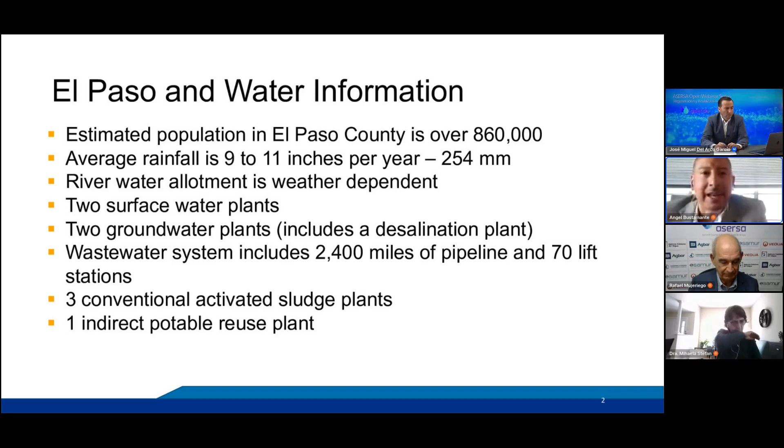So this is a snapshot of El Paso's water supply. For any given year, El Paso produces about 40 billion gallons of drinking water, which equates roughly to about 150 cubic hectometers per year.

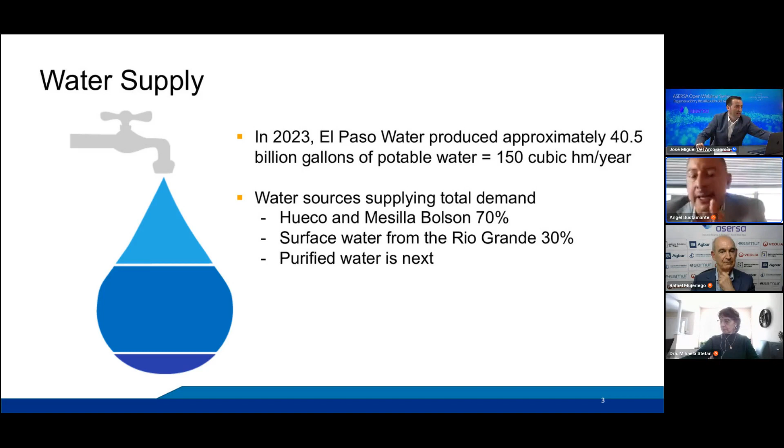Angel, where does El Paso Water get their drinking water from? We have 2 groundwater bolsons, the local aquifers here. They supply roughly 70% of our local demand, and surface water supplies about 30% of the demand. Purified water is next, and I will go into great detail on that in the next slide.

And I always include conservation on the list, right? I believe many of us in the audience are engineers, managers, or work for a municipal government. It's important, especially if we're in a drought, in a desert environment like El Paso and West Texas, to really convey that message to our customers. They already know that, however, I think it's good for continuous improvement to remind our community that we don't live in a place that has excessive water.

There are some places around the world that are maybe surrounded by water, but if you're in a desert environment like Spain or different parts of Latin America, I've heard that different parts of Brazil have been experiencing drought, where even rivers have dried up. Here in Texas and different places of the western United States, Arizona, New Mexico, we're all in drought.

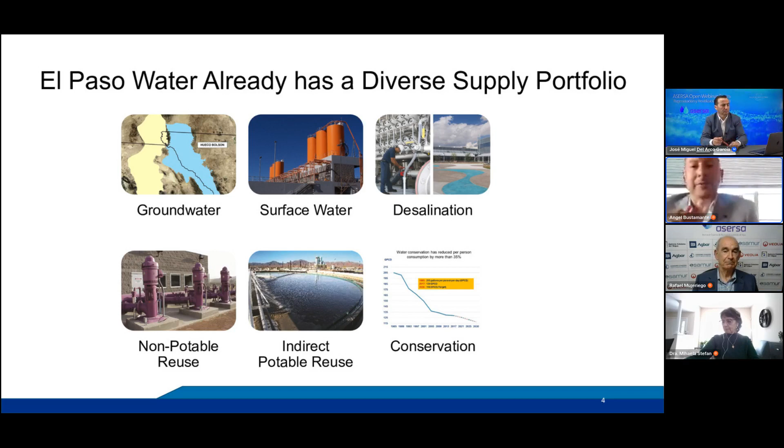Okay, so non-potable reuse. This is water that we've been able to reclaim back from our wastewater treatment plants and use for beneficial reuse. We've been doing this since the early 1960s. These are some pictures of our reclaimed water infrastructure here in El Paso.

We're primarily using the reclaimed water for cooling water for industrial purposes, and to supply water for irrigation, for parks and schools. All of this helps because it reduces the demand on the drinking water supply. We roughly supply about 700 million gallons total water every year to these different parks, fields, or schools for irrigation. We've been doing that here in El Paso since the early 1960s.

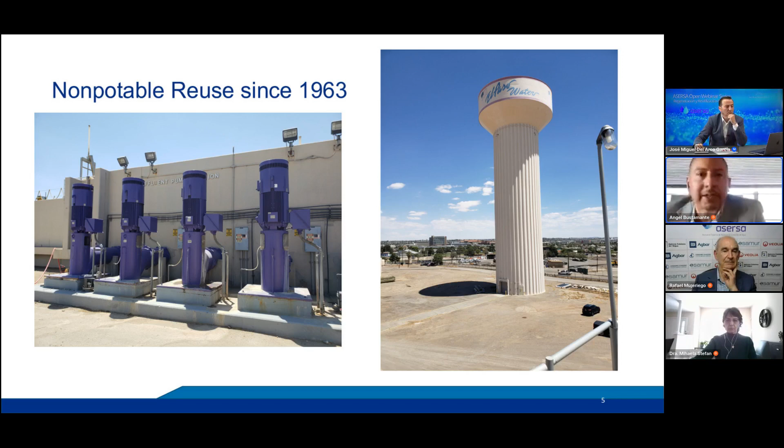This is a picture of the plant I'm working at today, the Haskell R Street wastewater treatment plant. Many of our customers may think of water that goes down the sewer from people's homes into the wastewater plant as water they would never think possible to reuse. However, with the strategy of One Water and trying to utilize wastewater, it's important to tell our customers it's not just a waste product, but a potential water resource for beneficial reuse, possibly for indirect or even direct potable reuse.

So these are pictures of the plant. The picture on the left shows our sand filtration, which reduces turbidity in the water, and the picture on the right shows our secondary clarifier. On average at the plant, our total suspended solids leaving the plant are roughly in the neighborhood of 3 milligrams per liter, and under the sand filter, less than 1 milligram per liter. So very good water to possibly use to feed an indirect or potable treatment plant.

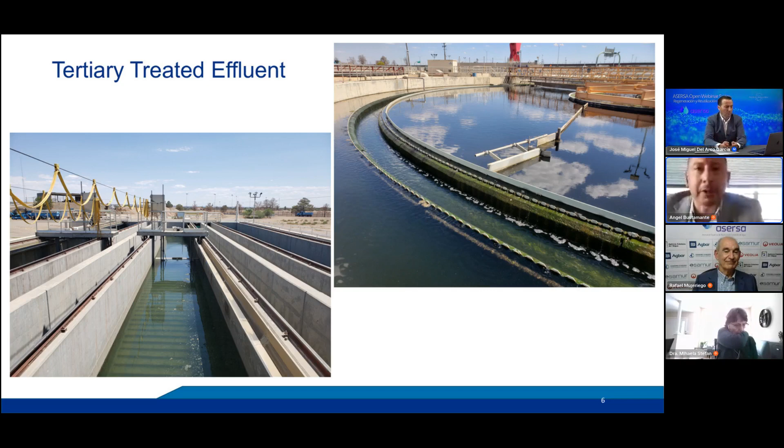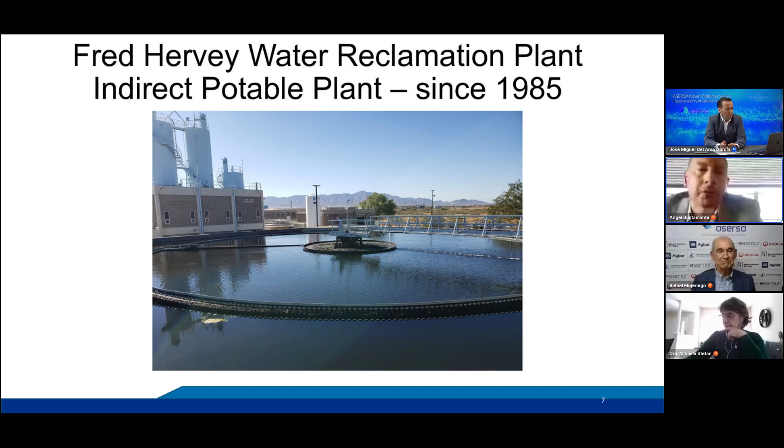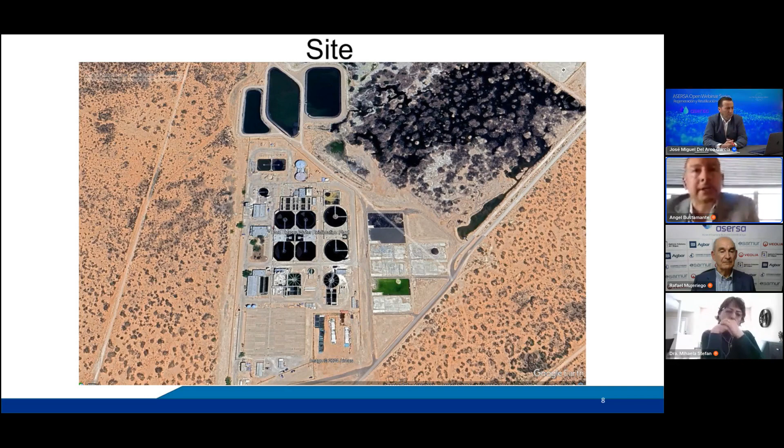Next slide, please. This is a picture showing the same plant. This is the equalization ponds. I think it's an important thing to remember, thanks to the wisdom of the design engineers of this plant.

If you're going to design a reuse plant, especially if it's direct potable reuse, the way many systems work is you have to supply constant pressure. However, a wastewater plant works a little differently, right? You get that diurnal curve. In the morning, people wake up, the first thing they do is use the restroom and shower. Eventually, after a few hours, that wastewater ends up at the plant. Then in the afternoon, it kind of drops back down, because people are at work. And when people get off work, they go back home and use water again. It's the normal natural cycle of our water use cycle. So there's a diurnal curve where the wastewater plant is not treating water in a steady state condition.

Having these equalization ponds allows us to continue to produce water at a constant rate. During the night, when less people are sending wastewater, we can feed off the ponds. And during the day, when everybody's at work or using water at home, we can fill up these ponds. So it allows the wastewater plant to continuously receive a constant flow of water into the plant, which means a constant delivery of water can leave the plant. Next slide, please.

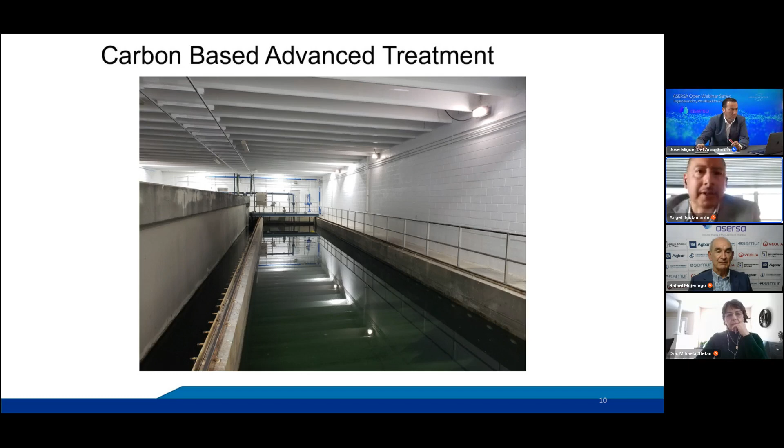This is a picture showing our granular activated carbon bed. In our industry, if you're going to evaluate advanced treatment, there's generally two schools of thought: one is reverse osmosis based advanced treatment, and the other is carbon-based advanced treatment. Both have advantages and disadvantages. We've been using carbon-based advanced treatment since 1985 here at the Fred Hervey plant. Next slide, please.

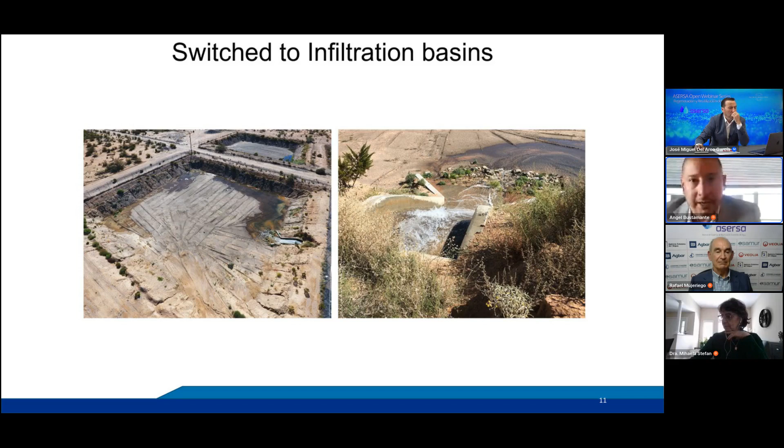Next slide, please, Rafael. I have a slide that actually shows a current view. I took this picture about a month ago. This is a picture of the infiltration basin. Environmentally speaking, it's very pleasant to look at. There's geese and ducks and birds and animals, and the water just simply percolates. It doesn't get very deep, maybe about a couple of feet, and then it will percolate into the ground naturally.

On average, we're sending about 1 million gallons per day to recharge the Hueco Basin in the northeast part of town. In the background of this slide, you can see the mountains. The mountains separate El Paso into two halves, the east side and the west side. This is a very beautiful picture of our city here. Aquifer storage and recovery. Next slide.

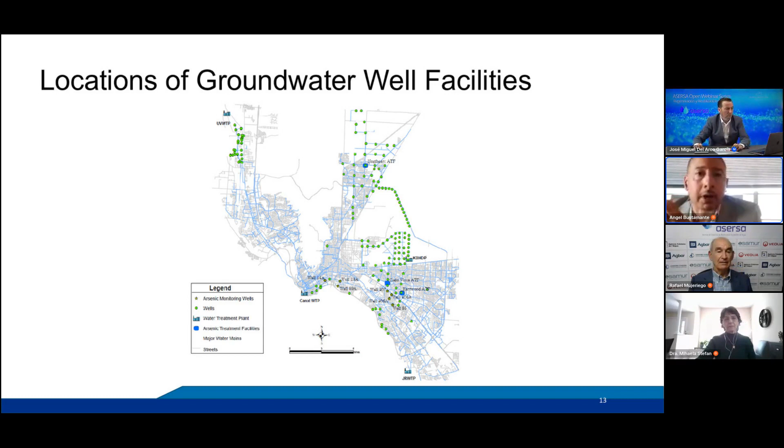We're happy to say that we're increasing the sustainability of those wells in the northeast because of our Fred Hervey plant. This is all coming from raw wastewater delivered to the Fred Hervey plant, and it's produced to near drinking water quality. We're very happy about that here in El Paso. Next slide.

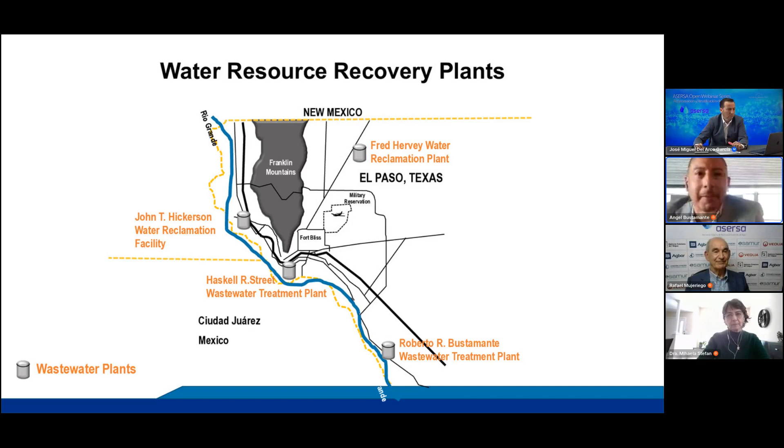Yes, sir, next slide please. There you are. You might—there you go, sir. Yes, thank you so much.

So here, there's a great opportunity, right? Because you have wastewater that's being collected by the collection system, then either secondary or tertiary treated—I shouldn't use wastewater, I should use resource recovery water—sent back to the river. Downstream, the drinking water plant picks it up. So here we have de facto reuse. I was very happy to hear that Barcelona, and I know many other places, are doing this. This is a great way to augment your surface water supply, especially if your reservoirs are decreasing in level.

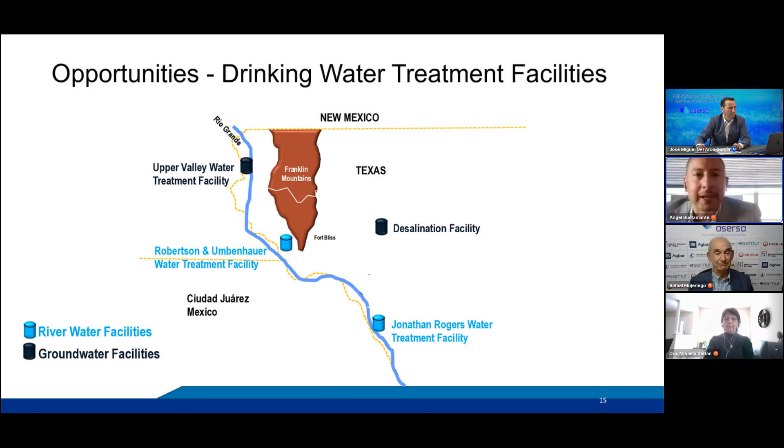So what are the challenges, right? Angel, you're talking about wastewater, you're talking about drinking water, and I was working in the drinking water plants for 10 years, and now I've been transferred to the wastewater side of the house here for El Paso Water, and I've been here for about a year at the wastewater plants. So it's true, many of you probably have similar experiences. You know, the wastewater operators, they talk and think differently from the drinking water operators.

And now we're talking about taking a secondary or tertiary treated effluent that's on the wastewater side of the house and sending it to drinking water. So how do the two mesh? Well, I like to remind everybody that's where reuse comes into play. That's where reuse is very important. So what are the challenges?

It's important to understand both sides. The wastewater system, the plant, they don't want to spill. Don't get any wastewater on the ground. They also want to make sure that they meet their permit requirements.

On drinking water, it's generally how to get the water to the right location, right? The water leaves the plant, you want to get it to the customers. And of course, making sure that drinking water quality is met, you need to meet all the primary standards, whether that's Environmental Protection Agency primary standards here in the United States, or international world standards for the rest of the world. And to make sure that that water supply is not interrupted, right?

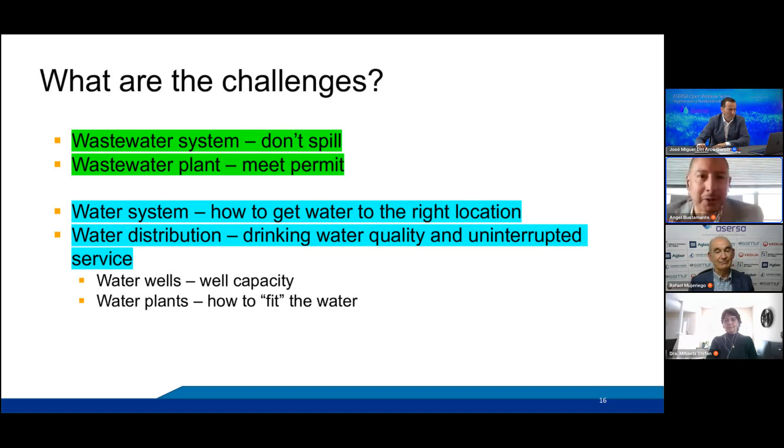Everybody appreciates waking up in the morning. The first thing they do is use the restroom, wash their face, shower. Whenever service has been interrupted, it's guaranteed that you're going to get a call from your customers to complain.

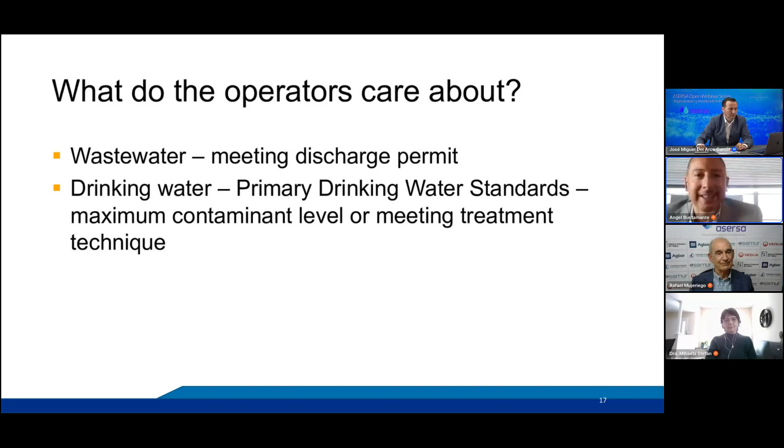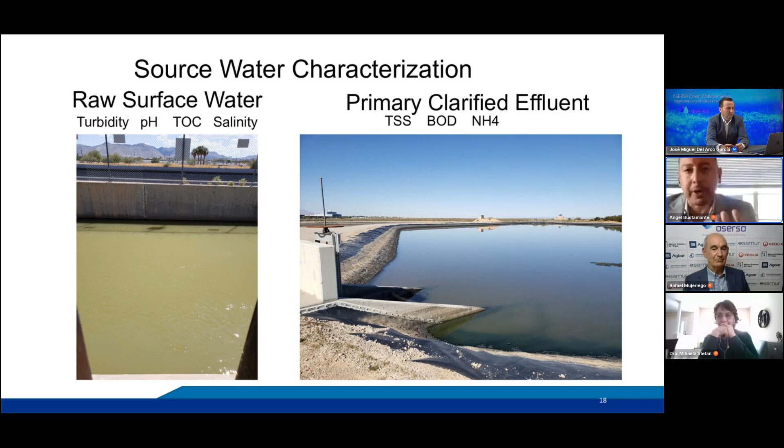For the picture on the right, that's primary clarified effluent at our Fred Hervey Water Reclamation Plant. And the raw water constituents that the operators are concerned about at the wastewater plant are total suspended solids, biochemical oxygen demand, and ammonia. So right off the bat, for the two plants, for the water coming in, you have two different sets of operators looking at two different parameters. So how do we get those operators to speak the same language?

Okay, there's also treatment differences, right? A wastewater plant, they have no control generally, unless you have equalization basins like we do at Fred Hervey plant. But generally speaking, the plant treats whatever comes into the plant. If the local sewer interceptor collection system is bringing in 20 million gallons per day, the plant is treating 20 million gallons. If it's bringing in double, 40 million gallons, it's treating 40 million gallons. The plant has to make real-time adjustments to their return activated sludge, waste activated sludge, and their sludge quality as environmental conditions change, such as the weather, and as the diurnal curve of the flow comes into the plant.

It's biologically treated. However, on the drinking water side of the house, you're relying a lot on chemicals, right? You're adding coagulants, you may use an iron or aluminum-based coagulant, perhaps a polymer. You may be using alkalinity adjustment, whether that's sodium bicarbonate or some sort of way to add back some alkalinity, and of course disinfection, right? So two different ways to treat the water, one biological, one chemical, differences in treatment.

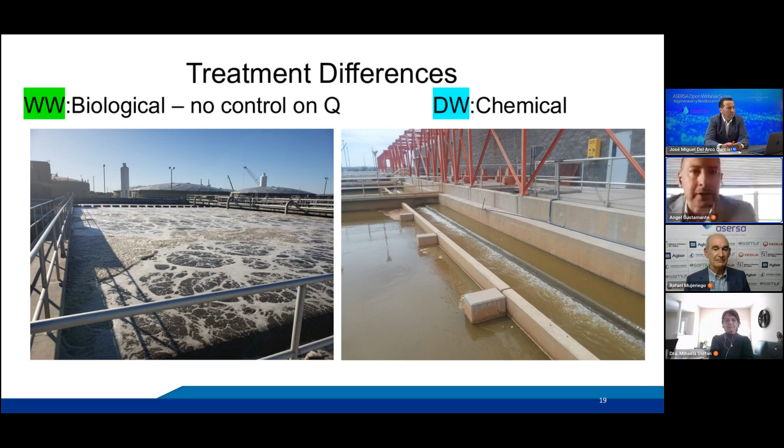The plant is also susceptible to washout if you have a sudden rainstorm, especially during our climate now with climate change. We have these unprecedented storms happening throughout the world. It seems like the pattern is we don't have enough water, or we have too much water.

This wastewater plant is susceptible to washout or plant upset if you have industrial users discharging things they're not supposed to, perhaps heavy metals, and it just creates a massive microorganism kill at your plant. You lose all your mixed liquor suspended solids, and of course you're discharging back into the environment.

So it's important to note that your pathogens, your E. coli, needs to meet permit for the receiving stream to the environment. You don't want to have a fish kill when you discharge your wastewater, or final effluent, back to the environment.

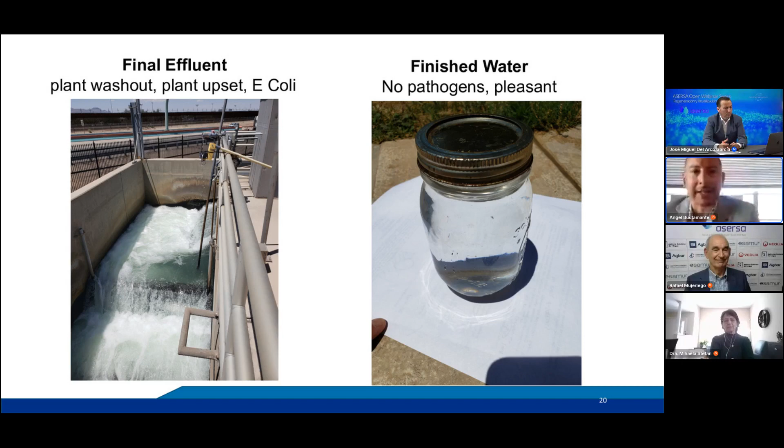Whether the local news is stating that we have lots of water and we're going to have plenty of water for the year, I think it's important for us as planners, engineers, and leaders in the water industry to understand: what is the total capacity of our reservoirs? And what type of message do we want to send to our customers?

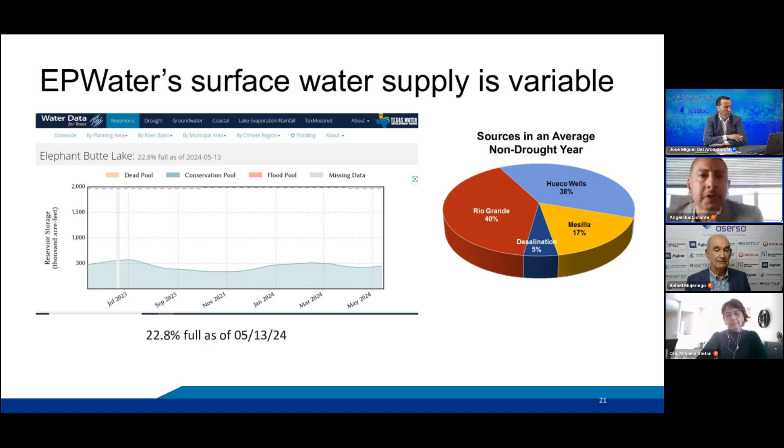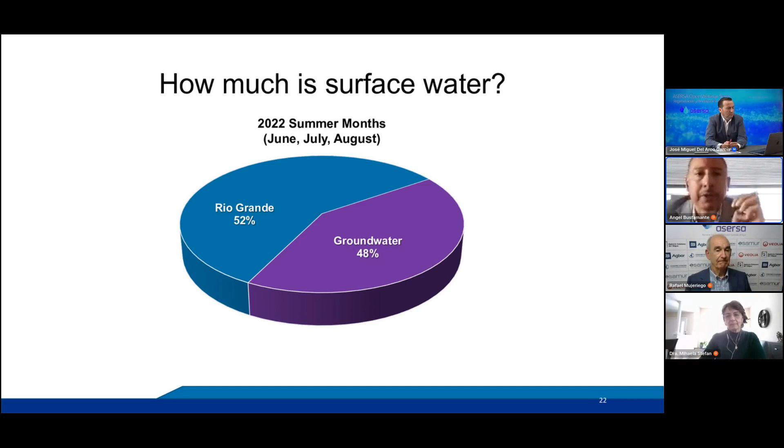California did receive a lot of water, especially snow, the last couple of years. But that doesn't mean that things can go back to the way they are in this picture relatively quickly. I know a lot of places in the world are dealing with this type of situation now.

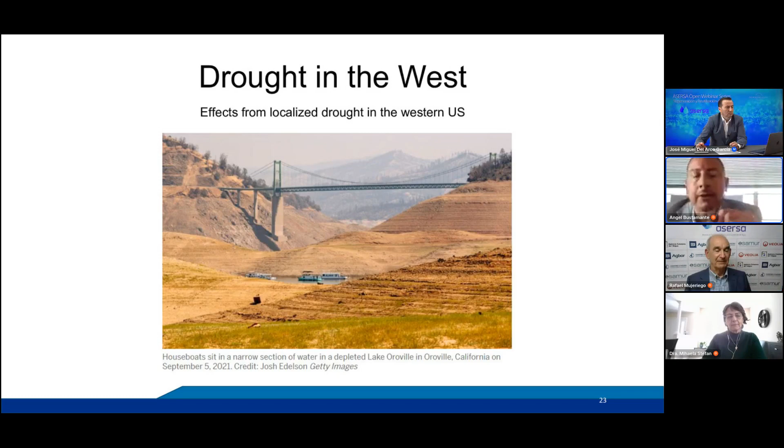Next slide. So how's Texas doing? Well, we're always changing, probably like many parts of the world.

Only God can bring us into the drought, and only God can take us out of the drought. As engineers, we're trying to make sure that we manage the water when we have it, and then basically preserve and conserve the water when we don't.

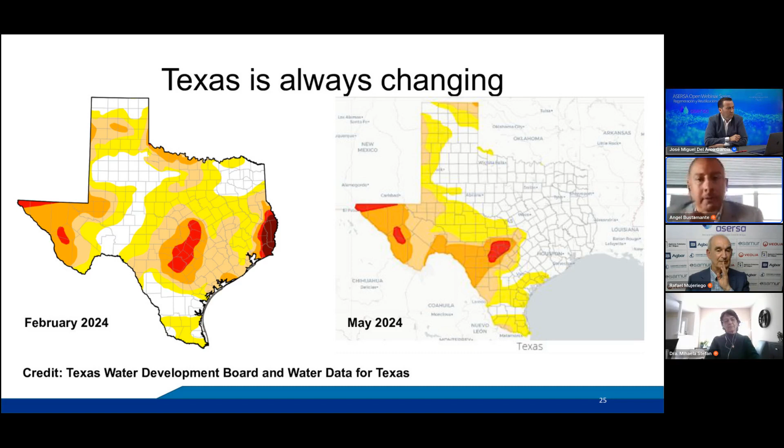Unlike East Texas, they may have their reservoirs full. It's important to convey this message to the local regulators.

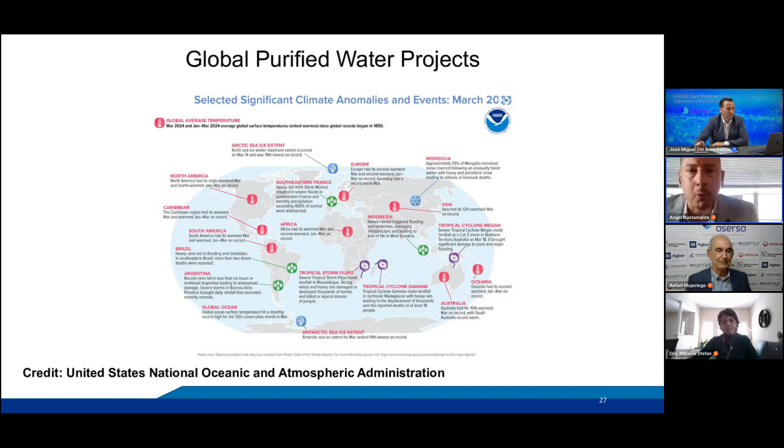I found this map, and I want to give credit to my friends from the National Oceanic and Atmospheric Administration. These are all different global purified water projects throughout the world. These water cycles are incredibly interesting. You may have a tremendous amount of water in a very short period, whether that's a typhoon, a hurricane, or some sort of monsoon. All your reservoirs may be filled up very short term, but you may have tremendous damages associated with that water. And there may be other locations around the world where there's sustained drought and no water, even during the next wet weather season. So it's important for us to share. That's why I was very happy—Rafael and everybody in this agency, thank you for asking me to speak—because I definitely think we have a lot in common throughout the world. All these stories are universal to all of us. So this just tells you the importance of a purified water system that's happening globally.

I found this from some engineers that came to El Paso about two months ago from Australia, and we were talking at the Fred Hervey plant about global purified water projects. These are all projects that are either in design, being discussed at a conceptual level, or actually in operation. We have experience now all over the world—whether it's South America, I've seen some there; I've seen many in Europe; and even in places I'd never expect, like the Eastern United States, where typically they have a tremendous amount of surface water or they're next to an ocean. In Virginia and in Florida. We all know about the record droughts that have hit Australia over the years, Southern America, the Latin Americas, and Africa.

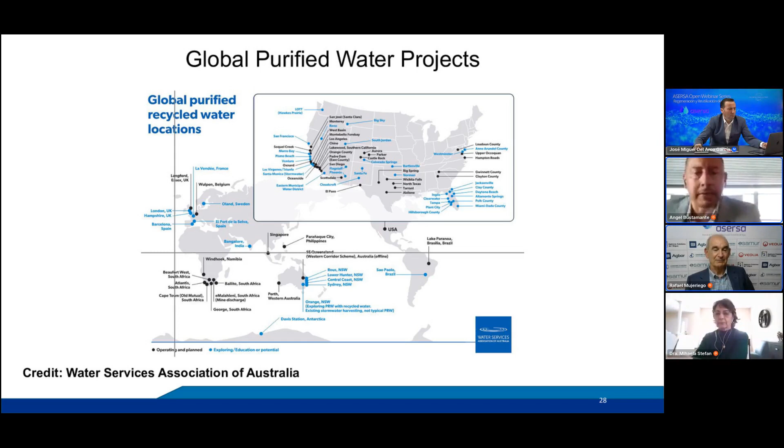The first DPR project actually went into operation in Namibia, in Africa. That's the very first one. You can read about it if you search on the internet, and they've been in production for many years because that was their only way to keep supplying drinking water for their city, for their community. So this is just an example, a testament—hey, if others have done it, why not us, right? Why can't we do the same thing? If it's been done safely, why not us?

So El Paso—I want to tell you about our direct potable reuse initiative here. We're about to break ground, starting construction this year for our direct potable reuse. It's going to be one of the first in the state of Texas, and there's a lot of excitement around this project. Of course, it's important to remember, especially to our customers, what is the source water—it's coming from a water resource recovery facility. It's no longer just considered wastewater. We want to reuse that, but we have to take additional precautions, right?

Safety first, health and safety first. That's the most important thing.

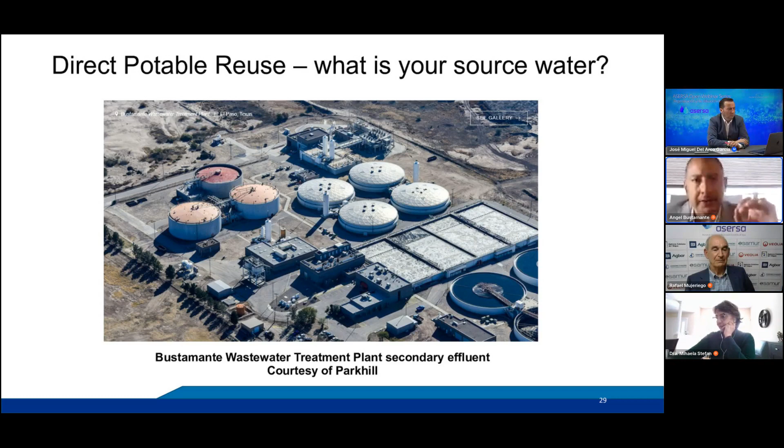Here in El Paso, we have an enhanced source control program. We have sensors placed in our local sanitary sewer collection system, and we're monitoring for things like electrical conductivity, pH, and temperature. We want to make sure our industrial customers understand they have to follow permit requirements and cannot discharge illegally. It's very important that they understand this, because the water being discharged will eventually be used for drinking water. We don't want to have plant upsets. We have these sensors all over our city.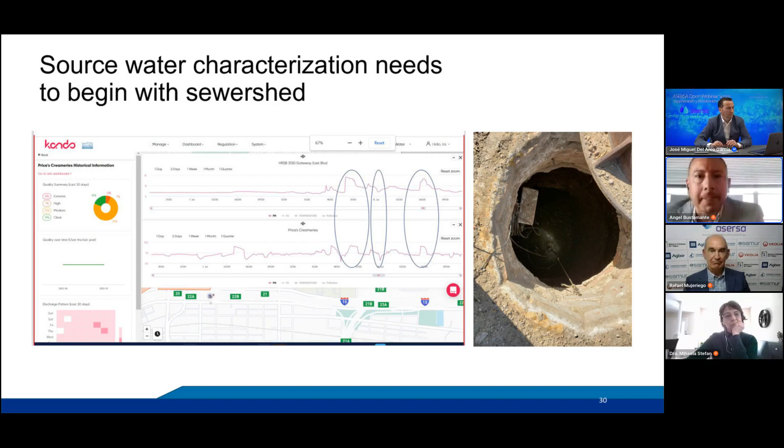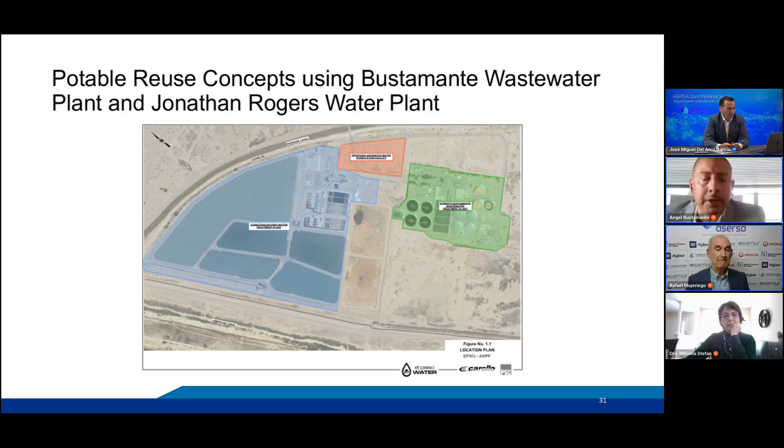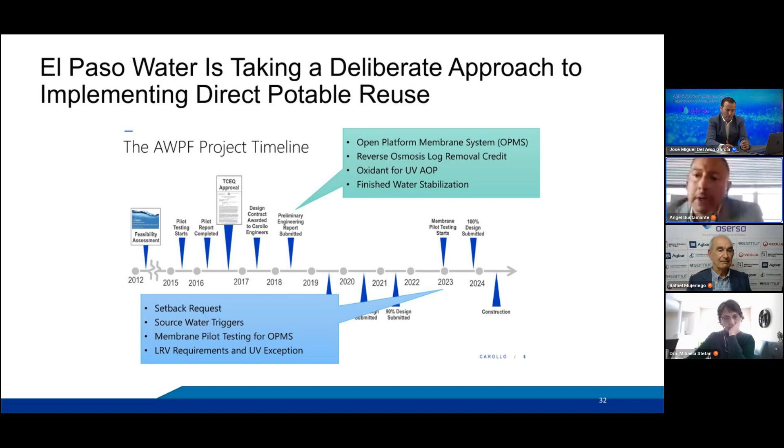These are the intentional steps El Paso Water has taken over the years. It's been over 10 years since we started this project, and we've taken a very deliberate approach, talking to regulators and our community. We brought in a panel of independent advisory technical experts from academia, consulting, and regulation, got them together in a room, and talked about the project. We talked about what things we wanted to do, what we wanted to avoid, all the regulatory hurdles we had to overcome, making sure we met health and safety requirements and log reduction values, talking to our customers to make sure they were comfortable, and making sure the design had adequate safety factors associated with the treatment.

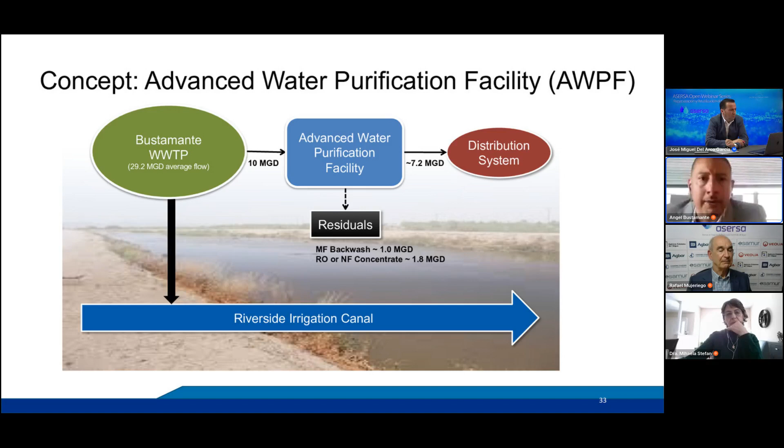This is the concept: take roughly about 10 million gallons per day of Bustamante treated effluent, send it to an advanced purification facility, and leave the plant with roughly 7.2 million gallons of water straight into the distribution system.

When the water leaves the plant, it's important to remember it's purified, everything has been removed. So you have to add back some alkalinity and some hardness. Here in the United States, and I'm sure in Europe and many parts of Latin America, we don't want to have lead and copper hits, right? We don't want our water to be corrosive. That's very important, so we've got to stabilize the water before it goes to the customer's tap.

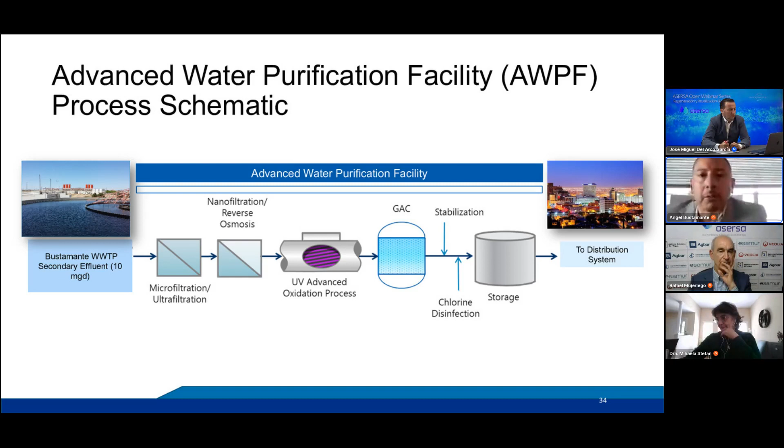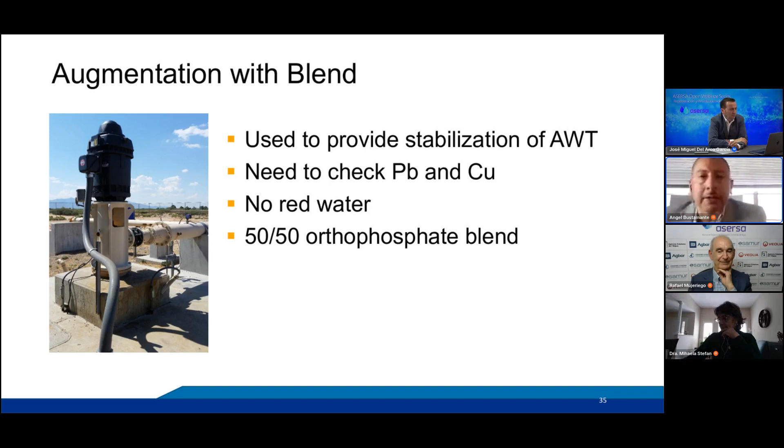So how do you do that, Angel? Make sure you check for lead and copper, no red water hits. Here in El Paso, we use a corrosion inhibitor, a 50/50 poly-orthophosphate blend as our corrosion inhibitor.

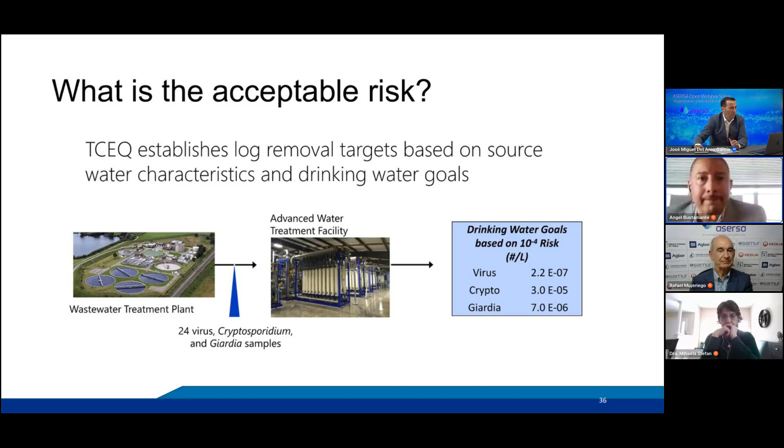The DPR operator - we talked about wastewater operators and drinking water operators, they talk different languages. You've got to really bring them into the room, you've got to have them talk to each other. That's really the way of the future. If you're going to decide to use potable reuse at your system, at your facility, they're the boots on the ground. It's very important that we educate them.

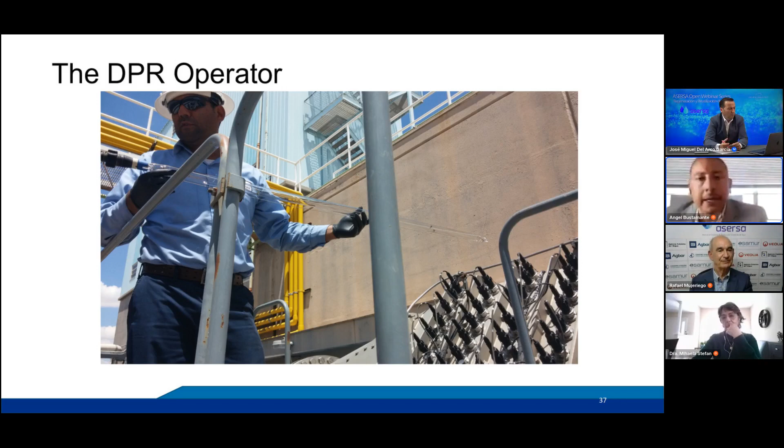Angel, how do we do that? Fortunately, there are many resources out there now. I know the state of California has a licensing program for advanced treatment. I found this yesterday on the WEF, Water Environment Federation website - they now have advanced treatment training for operators. I think getting dual licensure is a big part of it. I'm actually studying for my wastewater license now, I already have my drinking water license. If you can get operators that are a hybrid, who understand both sides of the house and understand the regulations, that's the best way, in my opinion, to ensure public health and safety for a reuse operator.